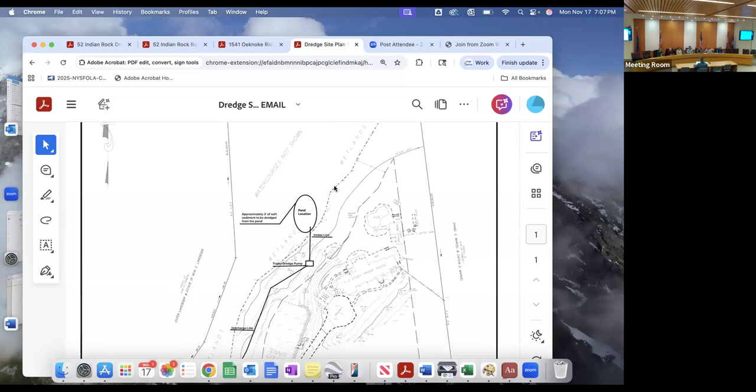Sorry to interrupt, but do you think you could maximize your screen? Oh sure, thank you. Can we see that? Okay.

The plan will be to set up our trailer mounted dredge pump on the property, as close as we can get it to the pond. The pond location is approximately here, where we will hand dredge the material using a 5-inch suction nozzle with crew members in the water. They'll pump that material along a 4-inch discharge pipeline to a dewatering tube staged at this location on the property. That tube will retain the sediment, leaves, and debris and allow the water to discharge, which will then be pumped back to the pond. Once dredging is complete, that tube will sit there to dry for 3 to 4 months, or until it's adequately dry enough to open and load into trucks to take the material off site. We will access that material for disposal from this additional driveway section here.

We'll have to temporarily open the existing stone wall that's there to gain access, remove that material, and then have that small section of the stone wall, about 6 to 8 feet, put back the way that it is now. We don't anticipate too much disturbance in the area where the dewatering tube is going to be staged, but we do plan to rake and seed and stabilize that area after we've removed that material.

Ultimately, after one autumn, you'll have the leaves. It's kind of in the wooded area, so there should be leaves that fall and cover that area, and you shouldn't be able to see that we were ever there after at least a season.

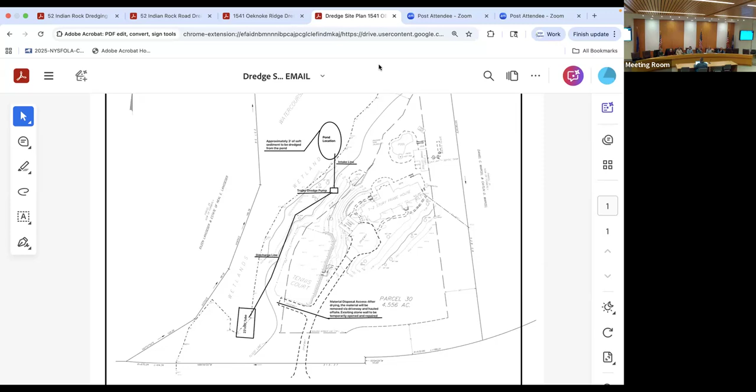Is it 3 feet of stuff you're taking off? Or is it 3 inches? It's not 3 inches, is it? No, 3 feet. Let me just double check. Yeah, 3 feet on average throughout the whole pond of accumulated sediment.

So the total will then be 5 feet of water? Is that right? About 5 feet. Because there's only 1 foot to 2 feet in the deepest, best areas of the pond right now. In other areas, it's reaching the surface with accumulation.

Are there any fish in there or anything like that?

I'm sure there probably are some fish in there. I didn't see any while I was looking at it. Certainly probably some frogs and things like that.

One of the advantages to our particular methodology here with the hydraulic dredging is that we don't have to drain the pond and dig it out, which means the only place in the pond that's actively being affected is the area that we're pumping, and the whole rest of the pond gets to act like an area of refuge for any wildlife that's in there. So things kind of get out of our way, we'll clear an area, and then as we move to the areas that haven't been treated, the area we've already done still contains the water to allow for some migration around the pond as we do the work.

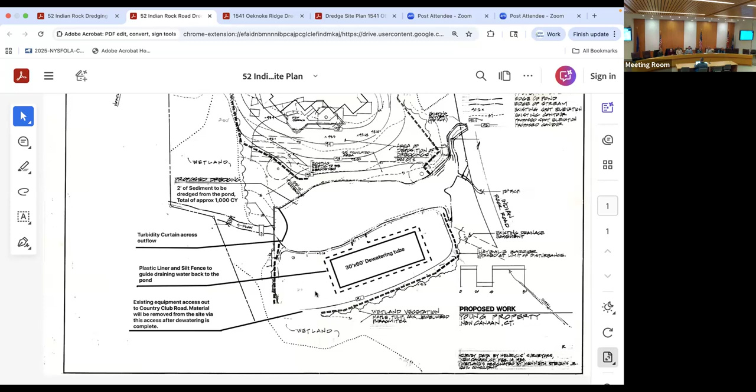This is Dan Stepanek. You're going to bring the equipment in via a special road, is that right? So the road which runs along the property, Country Club Road. It's an existing roadway, or driveway, or access pathway - I'm not sure the best term for it. It comes in from Country Club Road and has been used for dredging in the past and also whatever construction projects they've done there on the property.

So what kind of truck would you bring in down that road? Our equipment is actually just pulled behind a pickup truck. It's a small light piece of equipment on a flatbed trailer that we just pull in there and back down. I'm sure there will be larger sized dump trucks used to remove that material. There's a small stream or waterway with a bridge that spans it, but the homeowner has assured us that it is capable of holding any size of equipment that needs to get in there, based on its use for that same purpose in past projects.

So that piece of property is owned exclusively by the Youngs, is that right? Yes, correct. Thank you. Angela Jameson for the record.

I'm interested in what the cutoff point is when you decide whether to use a floating hydraulic dredge or the equipment you're planning to use at Oenoke Ridge. Sure, there are a couple of factors. One is the depth of water - the deeper the water, if it's over a person's head, we prefer to use this other machine, which can go down to 13 feet.

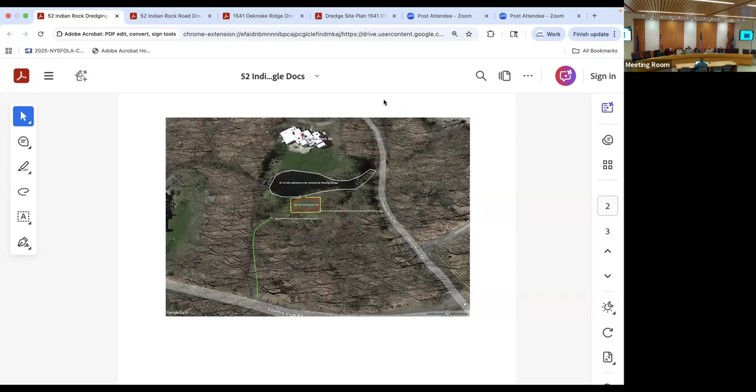Would you like to inspect the dewatering setup before we start dredging activities? Sure, I mean once I issue the permit, turn in the contractor compliance form, and then we'll coordinate as far as an inspection for sediment setup, the curtain in this one and whatnot. Good, good, thank you all. Very much, thanks Matt, have a good night.

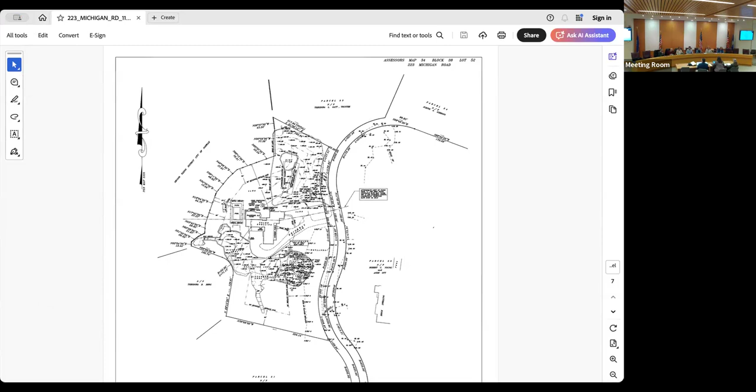So application IW-25-45, 223 Michigan Road, Pelagic One LLC: install additional erosion controls, remove fill from wetlands and within 10 feet of wetland line, then regrade at 3:1 slope to current elevation. Install subsurface stormwater detention facility and associated piping, replace existing pipes as needed, revegetate wetlands and upland review limit per planting plan, install irrigation lines, and place topsoil outside of 50-foot upland review limit. Sod all disturbed areas outside of upland review limit, remove erosion controls.

And the agent is Mr. Frangione of Frangione Engineering. Thank you very much for appearing here this evening. This application comes about because there was a violation, as I understand it. Work was undertaken in the wetlands and in the floodplain area without first securing a permit. So please could you include in your presentation, ideally up front, exactly why the violation occurred and what exactly was done, because the narrative you've provided is useful as to what you're planning for mitigation purposes, but it doesn't address the underlying issue of what happened before you thought about a permit.

Thank you, I'll start. Amy Zabatakis, Rucci Law Group, here on behalf of the property owner, Pelagic One. Carter Gray, the homeowner, is here as well with us this evening. Mr. Frangione, the engineer and applicant, is here, as well as Ms. Throckmorton, the landscape architect and wetlands engineer.

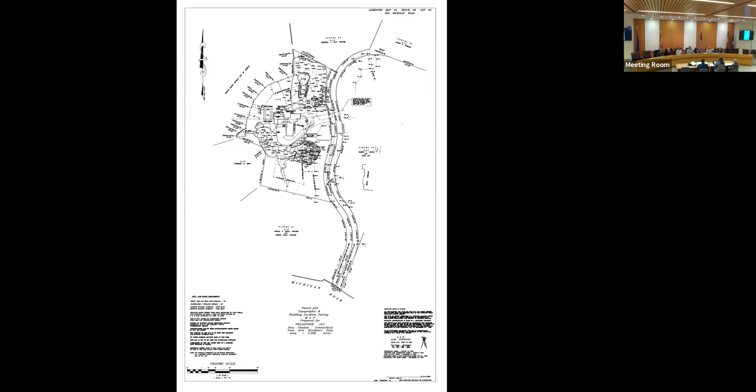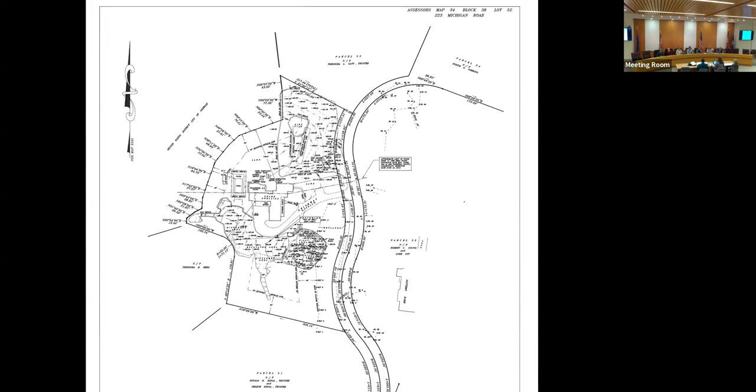We do have a wetlands remediation plan, as well as some plantings that we'd like to share with you all. One thing I should also note is that for the northern part of the property, I do have the survey up on the screen, although I realize it's quite small. Let's see if I can make this a little bit bigger. So you'll see that there is a flood zone line that goes through almost the center of where the house is. So we did file a floodplain management application.

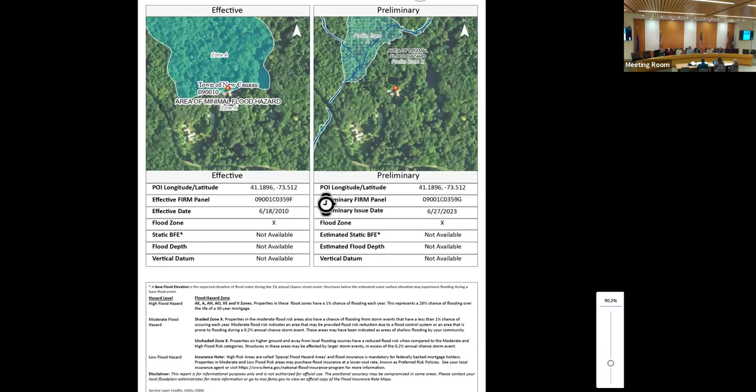However, there is on the town website, even smaller, FEMA is in the process of modifying the flood maps for New Canaan. And actually, based on the information that was available online, this new map should have been adopted in November. That hasn't happened yet. I'm not sure any of us know exactly when that will get adopted. But what FEMA themselves have found is that this property is not actually in a flood zone.

So basically, we took a look at it and we said, well, we can file a floodplain management application, even though we don't believe this is a floodplain, and we obviously therefore think there'll be no impacts, or we can file a LOMA. Since we know these maps will ultimately get adopted, we figured the floodplain application was the most straightforward. But as you'll hear from Mr. Frangione, we don't really think this is actually a floodplain, so we certainly don't expect any impacts from the work being done there.

And then the other work that is being proposed on the southern half of the property, we are within the wetlands upland review area, and we do, as I mentioned earlier, have a rehabilitation plan for that area. So I guess unless you have any questions for me, maybe I'll turn it over to Mr. Frangione to just sort of go over what the plans are.

Commission members, any questions at this point? Because you're showing us the FEMA map, can you tell us what we're looking at? So the left is what is in place now, and the red mark is where the house is or the property? That's exactly correct. Can you see my hand on the screen? Yeah, so that's the house.

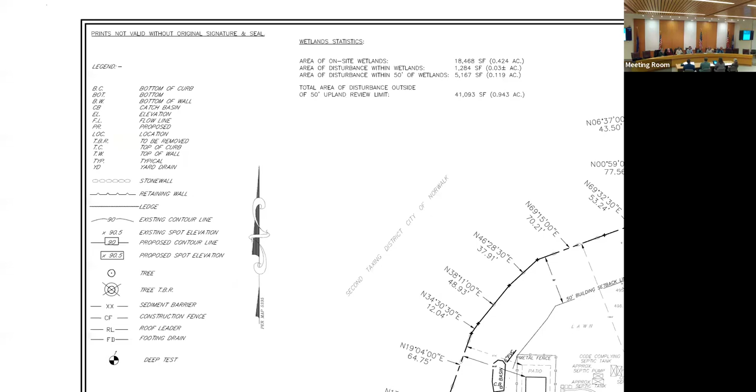Hi, thank you for hearing me on this. So as it relates to identifying the subcontractors used, it's my opinion with Amy's counsel that they operated at my directive. I agree that the wetland area, which is the southern side of the property, and the woodland area, which is the northern side, do look different, but by no means was it complete.

So when Kathleen did approach and see the property, it was mid construction, midway - maybe it was 3/4 or 90%, but it was an incomplete project. Thus, there were a few unpolished areas, one of which is, bingo, in the wetland area. So personally, I am, I guess, falling on the sword to not disclose who my contractors were, because they worked hard for me, at my directive. So I'm just going to try to provide context for the group here as it relates to that.

Well, Mr. Gray, thank you for that. And it's terrific that you're taking responsibility and falling on your sword, as you put it. But I have to say that I don't think your subcontractors did you any favors by not speaking up.

Well, you're absolutely right. We walked the property a handful of times with the survey, with specific attention to that wetland area. Midway through the project, material did move, and it was a very technical area. So when Kathleen showed up, it was in violation.

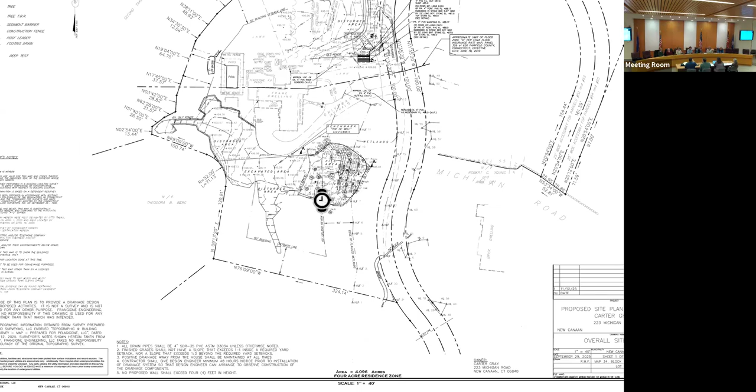When we walked the site, I pointed out to the commissioners basically where the wetland line was, and we're going to take all of that material out. We're going to take all the material within 10 feet of that wetland line out. Then, per the town's regulations for slope, which is a 1-on-3 slope, we're going to peel that material back. That material kind of migrated from the upper portions of that side of the property, when the stumps came out and dirt was loose, and you guys saw some big boulders that were there. That's where that stuff came from.

So the boulders, some of those boulders we're going to use as a demarcation feature when this is all done. We're going to remove this material from the wetland proper, from within 10 feet of the wetlands, and slope it back up. That comes to about 161 yards of material.

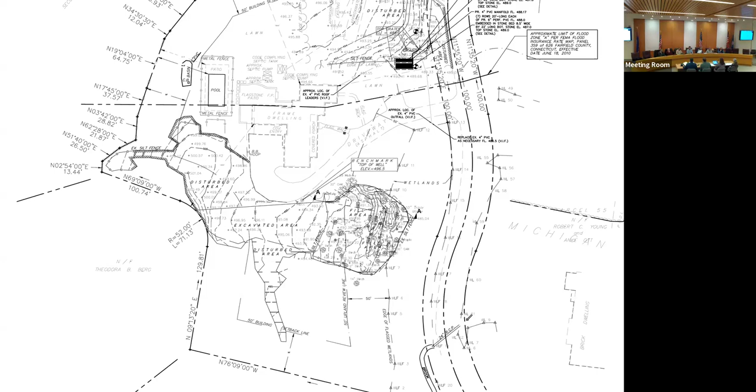That's going to all get dumped on the north side and stay on the site. Once that material is removed from the south side, that's when the boulder demarcation feature will go in, as well as the wetland mitigation plantings, the plantings in the buffer, and then we can stabilize the rest of the southern portion of the site. On the northern portion of the site, what I did was...

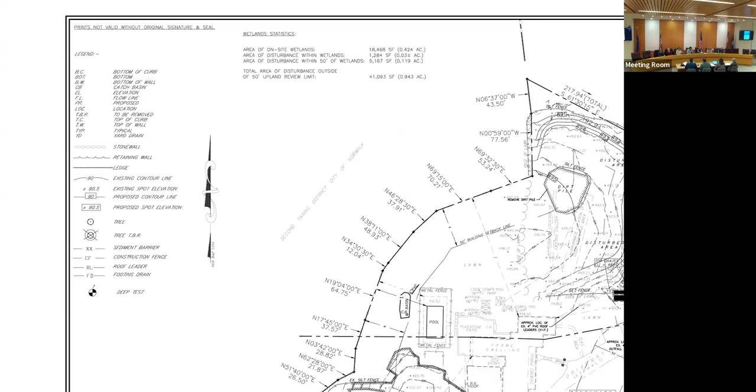And I know she's showing it up there. Oh, sorry. Yeah, that's okay. Oh no, I went too far. Yeah, keep talking, that's okay.

So on the northern portion of the site, we're going to still bring in some more fill to give more of a level yard, because there really is no backyard because of the way that the driveway dominates the front of the property, and then there's the pool in the back and all that. So we're going to kind of flatten out the north side.

But as far as stormwater mitigation - Commissioner Ramirez, could you just use a pointer as you're scanning around and talking about it? So this is the north side of the property. Thank you. This is that large dirt pile that you saw.

And then there's the stormwater retention that I believe Mr. Frangione is going to begin to speak about, down here where the boxes are. Right now, everything drains from north to south across the driveway and then out to the wetlands. There's a drainage ditch that then goes under Michigan Road and out to 266 Michigan Road. There are existing yard drains in the lawn, and the existing roof leaders go under the driveway and discharge just north of the wetlands.

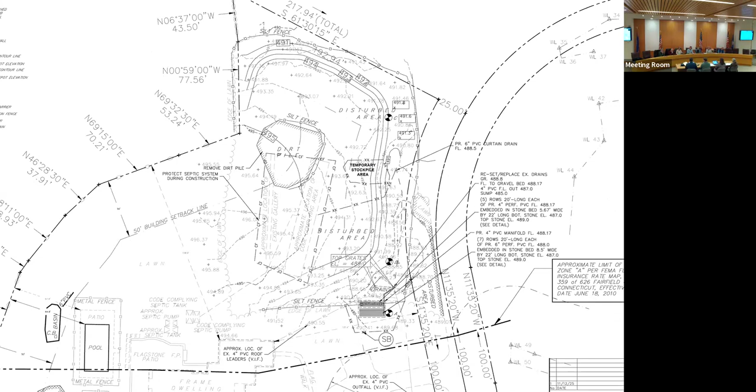So what I said was, okay, let's take advantage of gravity and where we have some room. We're going to replace those yard drains that are in the low area to the north of the driveway, create like a little mini detention basin, which will take the water coming off of the lawn and send it to an underground stormwater detention system comprised of pipe and gravel. That's what that box on the plan is. Then when that is full and it backs up, it'll go out the same pipe that goes under the driveway and out to the wetlands.

So we're using some of the existing infrastructure and we're just holding it back uphill and then letting it release over time. I've run the numbers for the entire site, assuming that it was woods and converting that to lawn, and that's how we came up with the flow rates and volumes. That's how I sized the detention system shown on the plan.

Once that's all done, then Kate has come up with a planting plan for the north side that will also be done. So that's really all I have, unless you have more questions for me.

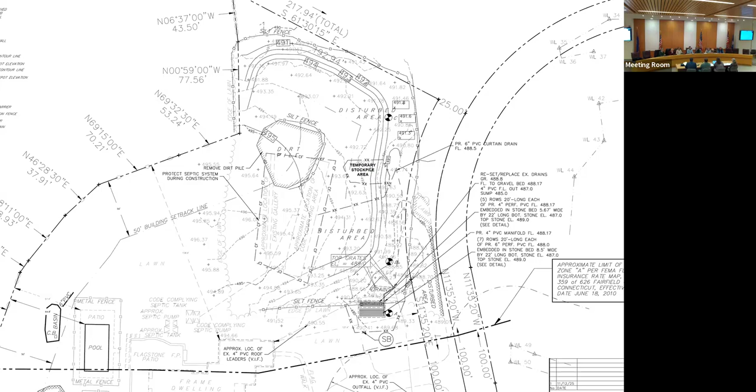Kathleen Holland for the record. Rob, can you go back to the southern side of the driveway? You mentioned a boulder demarcation wall - the plans are, there's a lot going on in that area. Are you able to zoom in and go over that in a little more detail, what you're thinking about for the boulder demarcation wall? I think that might actually be more on Kate's plan.

The plan is much. Oh, it's on your plan. Yeah, because there's so much. Get to that. Okay. Unfortunately, due to the nature of the plans, there's a lot going on. So it's on Kate's plan. Okay, that's fine.

Just for the commission members, as Rob was talking about drainage, Maria Coplet, our town engineer, did review it, and in OpenGov, I think she cleared you for what you have proposed as far as the drainage. So I just wanted to mention that. Health Department did have a comment.

Do you remember the comment? They were concerned about the impact of the septic system. We had Palladino and Sons go out and do an inspection, and the system is functioning and healthy. So the only caveat from health is that should Carter want to put an addition on and we need to do a code complying reserve area, we'll have to design a new one. But otherwise it's fine. Yeah, I just couldn't remember specifically what Amy had said.

And then lastly, the applicant is required to file with planning and zoning, and I believe they have a pending application, what's it called, grading and fill, regrading application, special permit application. So that's going to be going to the Planning and Zoning Commission, I believe, in December. So that's the second half of another review that will have to take place.

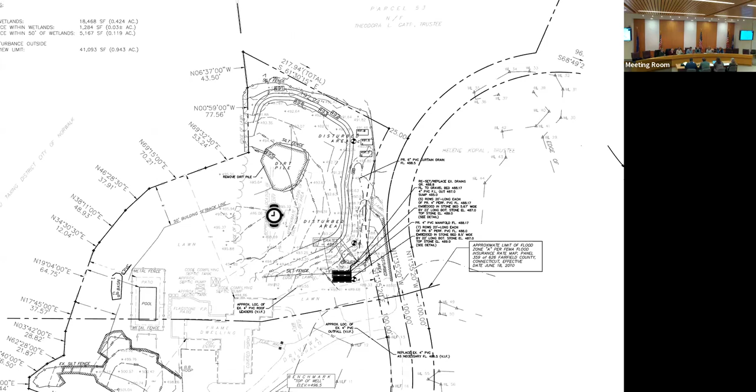Angela Jameson for the record. So I have a question regarding the situation of the wetlands in the southern area. I see that it's clearly marked on the plan that we have in front of us, but there were no flags for the wetlands when we went out to do our site visit. So where did you get this information from? Because that information hadn't been shared, if you like, on the site itself.

I was the original engineer for the prior owner when they built the pool, because we had to do the drainage plan for that and the floodplain management application, since that was done in there. At that time, we had the wetlands flagged on the property. Otto Thiel flagged them April 1st, 2020, and they were located by survey April 16th, 2020. Five years have passed, the flags have fallen down, but we knew where they were because we had them located by survey. So now we can still operate. If we needed to, we could have RKW go back out and rehang the flags. Otto is unfortunately no longer practicing, so he can't.

So I'm glad you know where the wetlands are and where the flags were, because unfortunately the commission members didn't when we did the site visit. We've done the site visit now. Personally, I don't see the point of asking you to put those flags up, but just so you know, for future cases, it was disappointing not to be able to demarcate exactly where the wetlands were. Sorry about that.

I just, again, since we had the information on the survey and we knew from a regulatory standpoint where the wetland line was, and we were working to clear out and clean up the wetlands and protect it. So that was our focus.

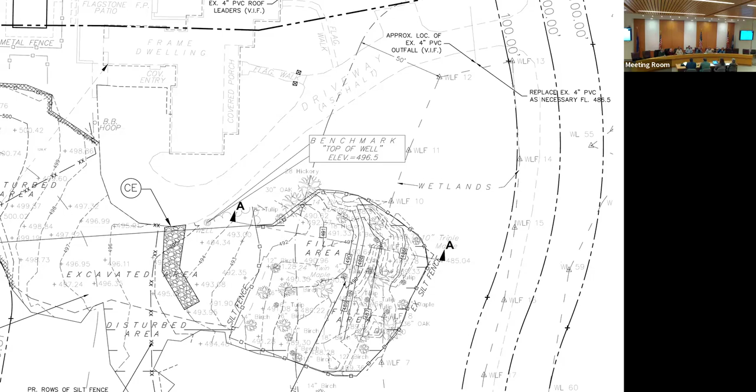Are you ready to hear from Ms. Throckmorton? Anybody has anything else? At this point, I think we're ready to let you continue with your presentation. Thank you. Let's do the south first, okay? Oh shoot, your plans ended up sideways. Let me see if I can get this. Counterclockwise, sure what this is. I know.

There we go. Okay, good evening. For the record, Kate Throckmorton, a landscape architect with Environmental Land Solutions. We prepared the planting plan, or I should say the stabilization, restoration and planting plan, specifically for both areas, but I think for this commission really more focused on the south side where there was some intrusion into the wetlands.

I think Kathleen caught this really at a good juncture because it seemed like there was just a couple of days worth of miscellaneous pushing of material into the wetlands. There were no trees lost. The majority of the trees are still there. Specifically, there are 3 large oaks that are not only still there, but unscathed. So I was very happy to hear that because that's significant.

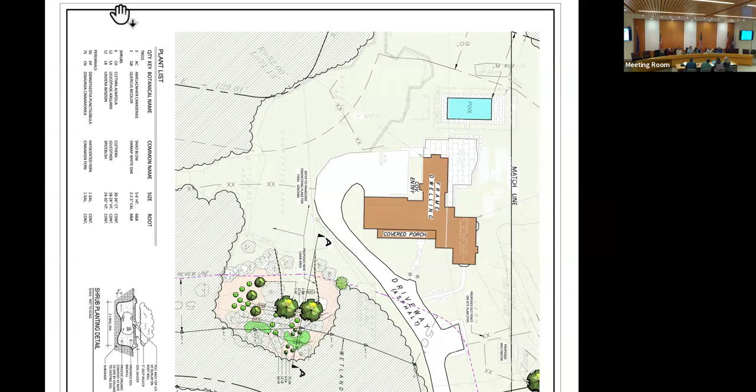Still sideways on the screen, they're saying. Oh dear, can you right click and rotate? Oh, I did already, it's right on my screen. That's why, I'm just trying to reshare again. There we go. Okay, all right, here, okay, take it, okay.

All right, so just to add some color to this plan so it was easier to read, the green hatch areas are the areas that have not been disturbed. This area right here is the focus of the disturbance area. There are 2 lines of silt fence, one which was here, which protected the larger clearing area. And then these kind of cloud circles that have the hatch in them are the trees that still remain in the area.

There is kind of a push of material, it was really just through this lens and through all the existing trees. And fortunately, I'm happy to say that the several large oak trees are still there, they're not filled and they're not banged into, so they really serve as an anchor to provide long-term function for this area. So the area that was filled, not heavily, but certainly had soil brought into it, is the area where Rob is showing that all that material is going to come out and it's going to be heavily replanted. As I said, most of the trees are still intact.

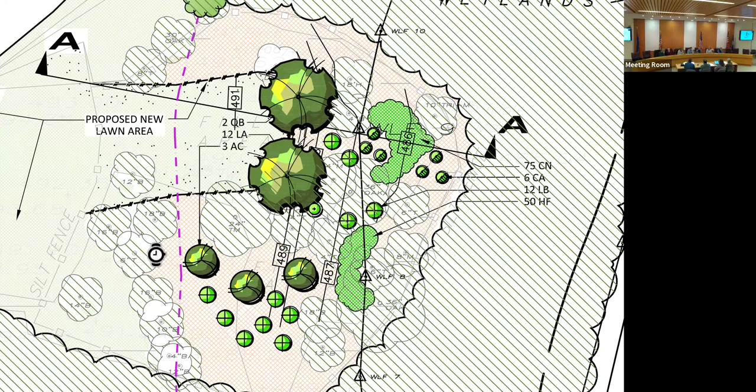I'm just curious from the site visit, I'm remembering when we walked in that way, that looks like that was where some of the fill was. That's the upland review area, correct? Yes, the pink line is the upland review line. So to my right, going towards the two new trees, you have this rectangle of new lawn, correct, which before that was woodland going upland wetlands, correct.

Not sure why you'd put lawn in the upland review area. It's an area that there is now fill that needs to be stabilized, so I'm stabilizing it with seed grass. Meadow grass, or is it going to be lawn? Meadow grass. Got it, thank you. There's a seed specified in my notes, that's a conservation mix.

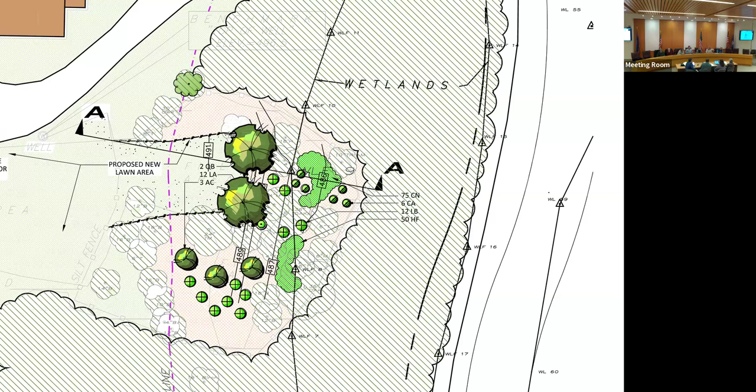Any additional questions on this south side before we move on to the north side and the plan for plantings there? No, so maybe you could talk us through, Ms. Throckmorton, what you're proposing for the north side, which as of this point is still wetlands.

Yes, well, I'm going to clarify that. I would say it's a regulated area, not a wetland. But it is a regulated area. There's actually wetlands to the north and to the east, but this area does not have wetland soils in it, and it is not within a 50-foot upland review area as the southern area is.

I think from hearing the previous testimony, it was the owner's desire to make this an open active recreation area. So we've added trees around the perimeter, shade trees to extend along the driveway, extending the ones already there that did remain, and 6 understory trees along the north edge of the property. The rest of it will be seeded as lawn, as was the purpose.

Excuse me, what map? I'm just looking at the online material. What is this one called? It's called Planting Plan PP1. The title block is Planting Plan, Floodplain Management Application, and the label is PP1-1. I tried to label it as northern—look at the email I sent, it's in that email. We may not have been able to upload it to your portal yet. Okay, but you do have it in the email. I sent it to everyone. Yeah, I looked at that before. Now I see. Okay.

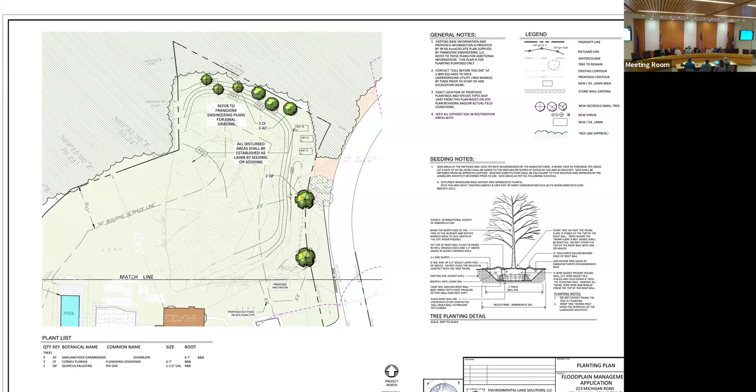Yeah, but maybe we should just hear from Miss Throckmorton. Oh sure, yeah, Miss Throckmorton? Well, I think because on the southern side there is still a fair amount of trees in the upland review area, and the area will remain wooded, and it's documented which trees would stay.

I'm not overly pushy about having it, but one or two maybe in the area that's kind of the edge of where the demarcation starts might be a good reference for the future homeowners and for the town's reference as well. I mean, it's easy to not put in a boulder demarcation feature. That just means we don't do anything.

I think we discussed it amongst ourselves, as the rocks are there, so we just got to move them. That was the only reason. We know that historically the commission likes to see some sort of demarcation feature for an upland review, and that's pretty much the only reason why we even offered it. If it pleases the commission and staff to not have a demarcation feature, then why would we put one? Personally, I just don't think it really adds anything to the landscaping plan, especially on the southern side.

I don't see how it adds anything other than being aesthetically pleasing, if you wanted to put some boulders out there. Well, that wouldn't be the intention. That's it, I don't think they're really going to serve a demarcation feature.